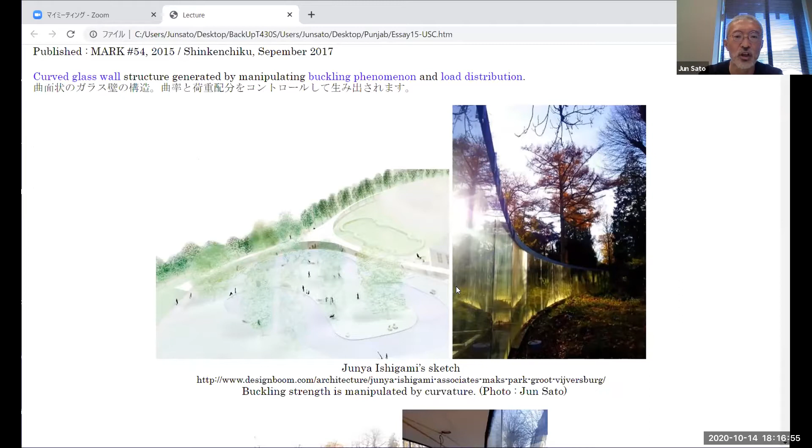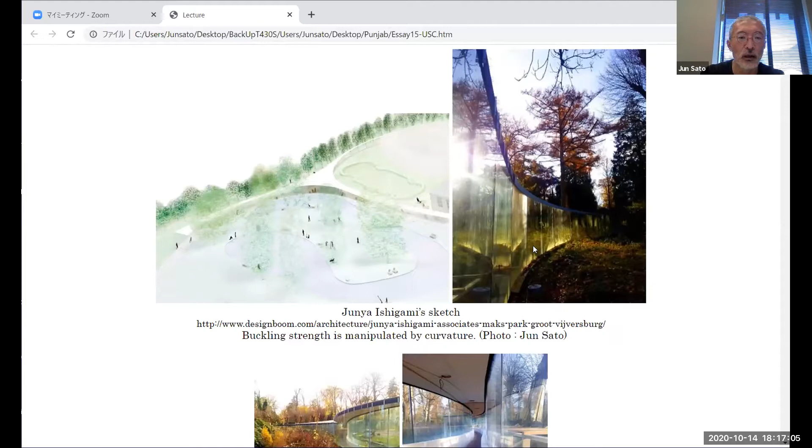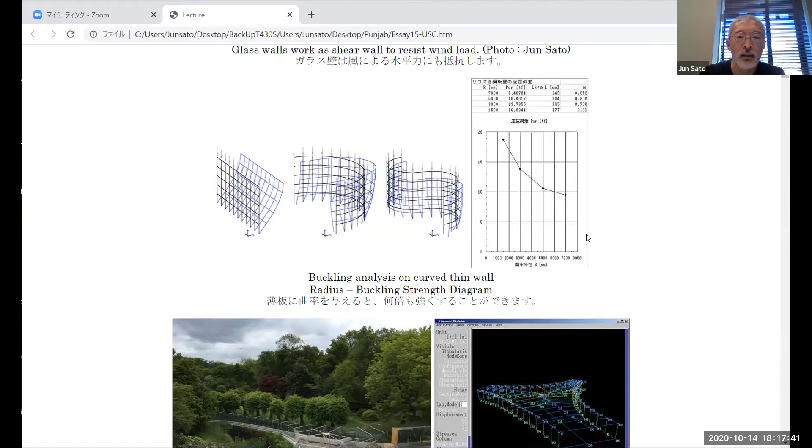When the thin wall could be curved like this, this shows the relationship between radius and buckling strength. As the radius comes smaller, the buckling strength becomes almost twice as big, or sometimes 4 times, 6 times bigger. So depending on the load distribution, we can give curvature to the stressful area. For this project, I optimized the location of beams as well, the spacing of the beams, meaning the pattern of beams could be optimized to distribute the load evenly to the stressless area on the glass wall.

And finally, we could build this structure with only 10 millimeter plus 10 millimeter double layered glass. You can see the construction site on the left photo. The white lines you can see are beams assembled in an optimized way.

When discussing with Junya Ishigami, we tried brainstorming again and again, and it takes really a long time, 5 hours is rather short, 5 to 8 hours each day. He asked me a lot about the structural phenomena, and I had to explain how the buckling phenomenon happens, how to control the buckling strength, and how to manipulate materials. Through that detailed thinking of each phenomenon, sometimes a new structural or design idea comes up, so this discussion is necessary.

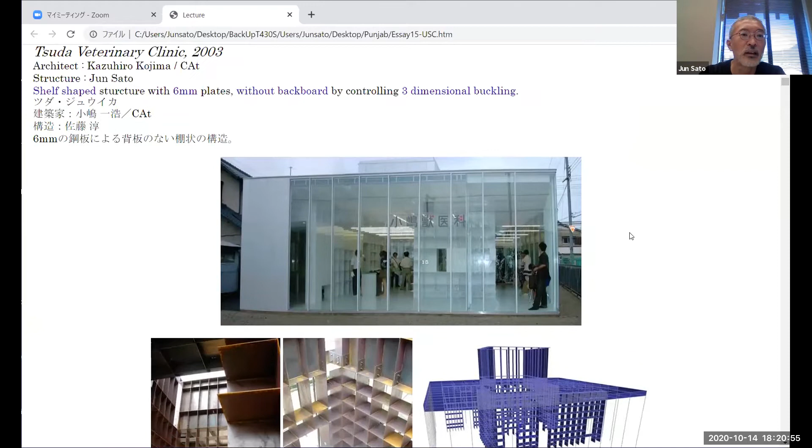But this is unique for Junya Ishigami, not all architects. With other architects, I don't discuss so long. There are some simpler ways of embedding structural design into simple geometry, but I'll skip these for now and talk about it later if I have time. For example, this is a simple single-story building, a veterinary clinic, and the structure is composed of a shelves structure made of 6mm steel plate without a backboard, so you can see the transparent shelves because there's no backboard.

These are the construction sites. And we have to control the three-dimensional buckling phenomena.

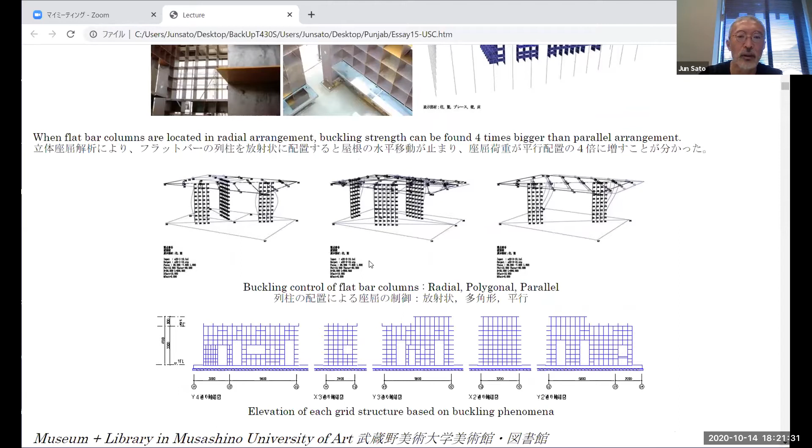This is a project with Sou Fujimoto, the museum and library in Musashino University. And for this library, I have embedded the thin rahmen structure.

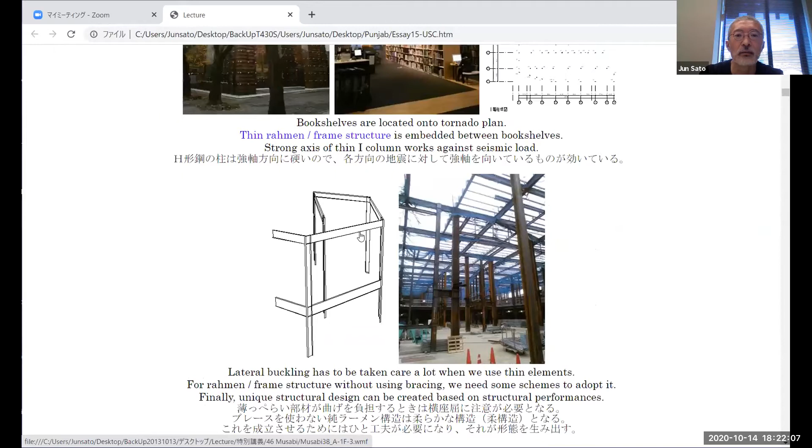Rahmen is a German term. I think it is called rigid frame or frame structure. It could be thin and thin like this, embedded between these bookshelves. To make it feasible using thin columns, we had to take care of lateral buckling here.

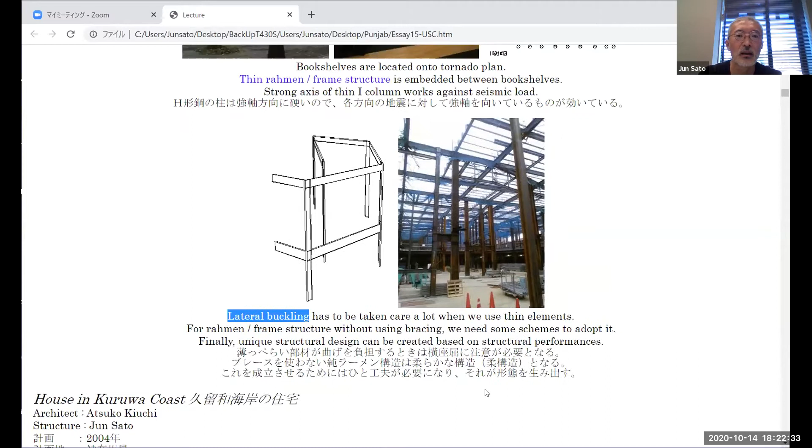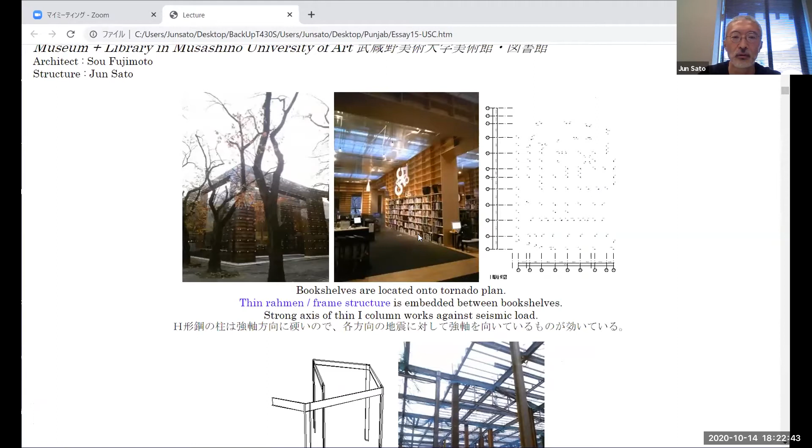This rahmen structure is a very simple structure, and this building has a really simple view, but by manipulating some structural performances, the unique structural design can be created based on those performances. The structure itself will be concealed, but it is working to create the space.

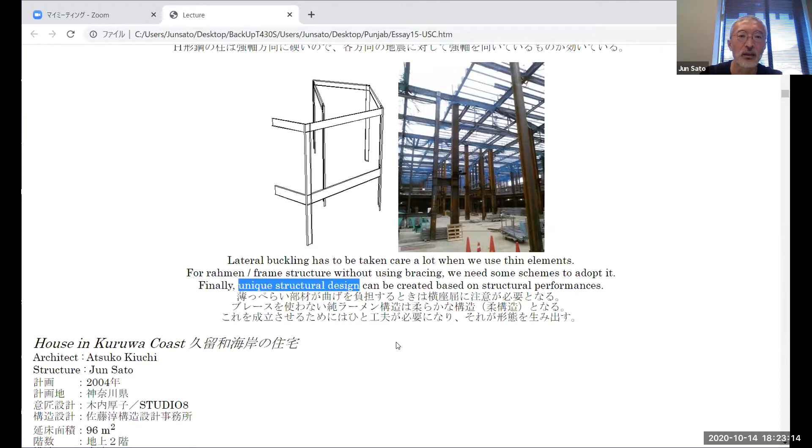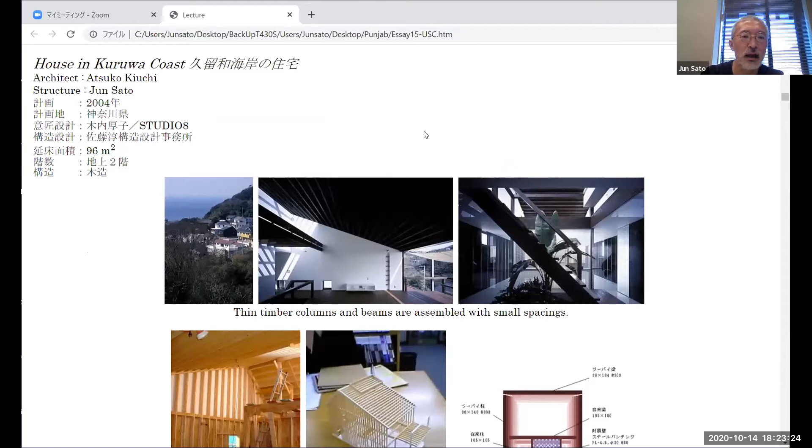So I think this can be recognized as one way of structural design. And I like this house - I cannot talk about it so much, but a house in Kuruwa Coast. It's a timber structural house with a simple shape like this, and inside there's a perforated steel sheet.

This works as bracing on the first floor, and that shear wall is stabilizing the columns located around here. The columns are cantilevered up to the second floor. Finally, because these columns can work against seismic or wind load, we don't have to put a shear wall on the second floor.

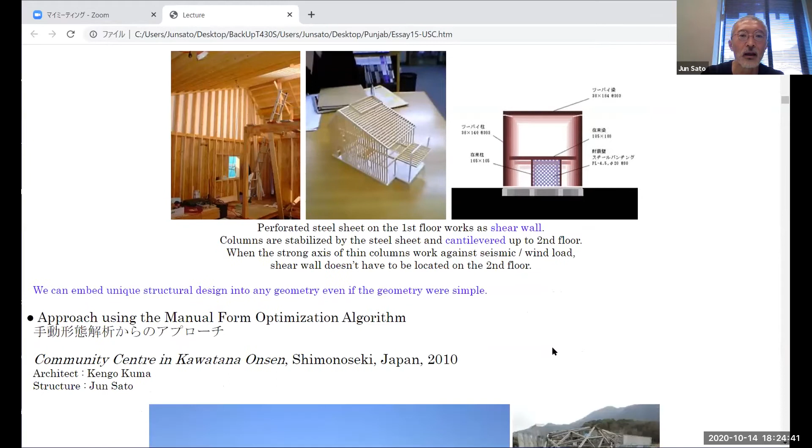This is also a simple way of using structural performance, but I think you can see how the structural design can be embedded into a simple geometry.

I think some of you have interest in optimization, form optimization. I'm trying manual form optimization and a little automated optimization. One project could be this community center in Kawatana Onsen with Kengo Kuma.

It has a polyhedral form, like mountains, and is made of steel tube structure covered with concrete surface. For this structure, I have developed optimization software like this.

When the polyhedral shape was concaved and convex in a random way - not really random, it is controlled, but looks like random - some shapes are strong, some shapes will show weakness. So we have to control those geometries.

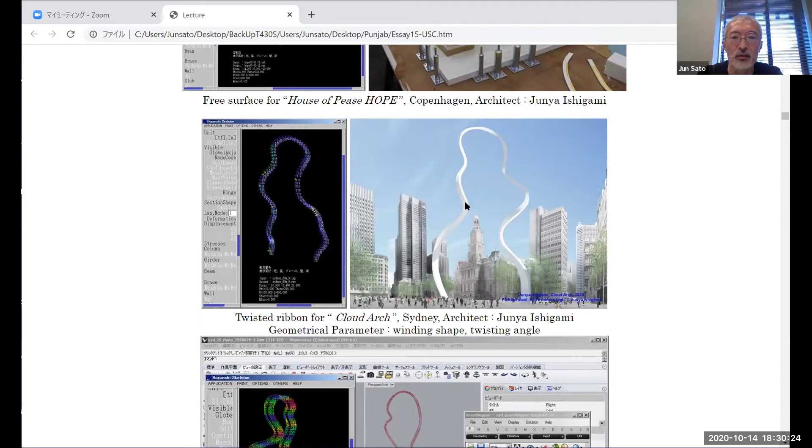It has this ribbon-like structure, and the parameter for optimization is how this tower could be wound into the air. The curved line can be optimized, and also the twisting angle can be optimized. So there are 2 parameters of geometry we used for optimization.

This can be done by software developed in my lab and in the office. But these days, we have a lot of 3D modeling software like Rhinoceros and Grasshopper, or some other software. So we can create the component of the software.

For example, composing the software with Rhinoceros, Grasshopper, and my software. It is called Hogan.

If it could be linked, the geometrical manipulation can be done by 3-dimensional modeling software, like Grasshopper. And the safety ratio can be checked by my software; this software component tries to check the safety ratio every time you change the shape, again and again. This iteration is understood as an optimization process.

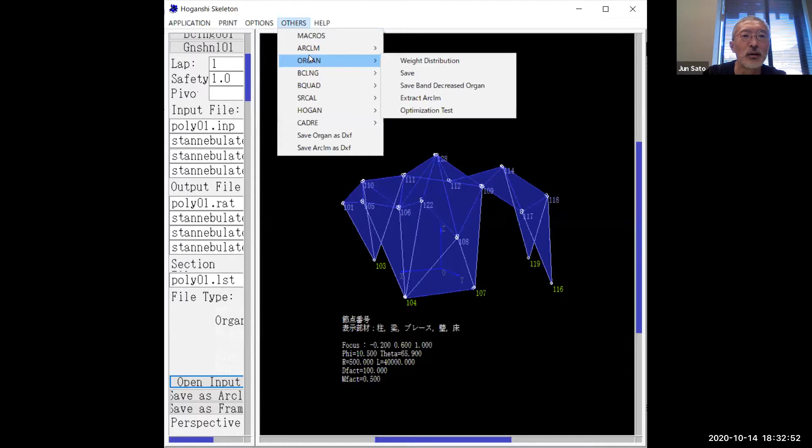And I think many of you know how the optimization could be done. So this is not so unique, but if it is automated, at first the safety ratio shows 1.53. So over 1.0, that means too weak. And starting the optimization like this, it is searching how the form should be transformed.

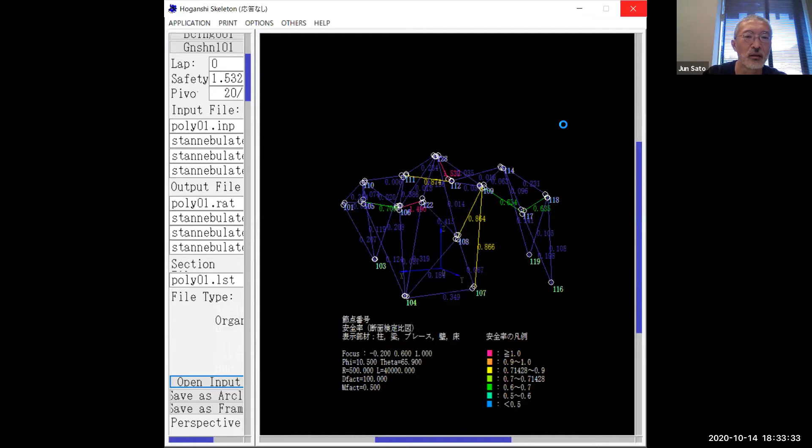And in this algorithm, I'm using the conjugate gradient method. There's the gradient descent method, the basic one for optimization, and a little, how to say, developed to find the result faster, we have the conjugate gradient method. And some other methods are developed to find the solution quickly.

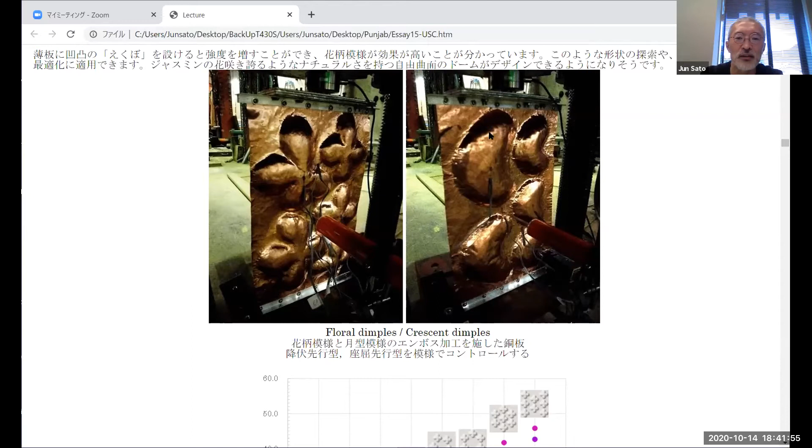And 2 years ago, my student in the master's course found the flower dimples are much stronger than circle dimples or crescent dimples. So we are trying to scatter the flower dimples like this onto stressful areas. And finally, we will be able to develop a free-form dome with scattered flower dimples, or a thin metal shell structure with these jasmine dimples.

And because these dimples are applicable for thin metal structures, I have started developing the lunar Mars base with JAXA, that's Japanese NASA. It is a little confidential, but using those dimples and something deployable structure for that.

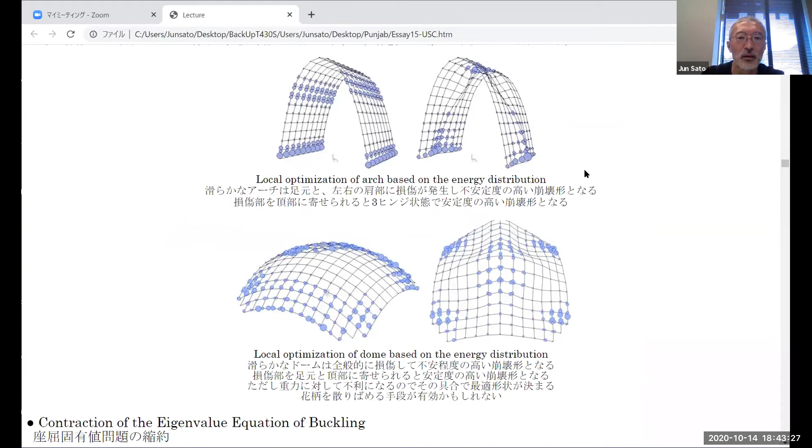And energy absorption based on the seismic vibration will be applicable for the optimization, but I'll skip it. I think I don't have so much time. And for the buckling phenomenon, it is good to look at the eigenvalue equation. I hope some of you are structural engineering students, but I'm not sure. But if you have interest in the buckling phenomenon, it will be good to focus like this. All right, I'll skip it.

And standard glass structure is developed in my lab as well. In my lab, some glass structures are developed like this. And extreme nature with Junya Ishigami is developed. This structure looks simple as well, but the deformation and the bending stress could be reduced in this way.

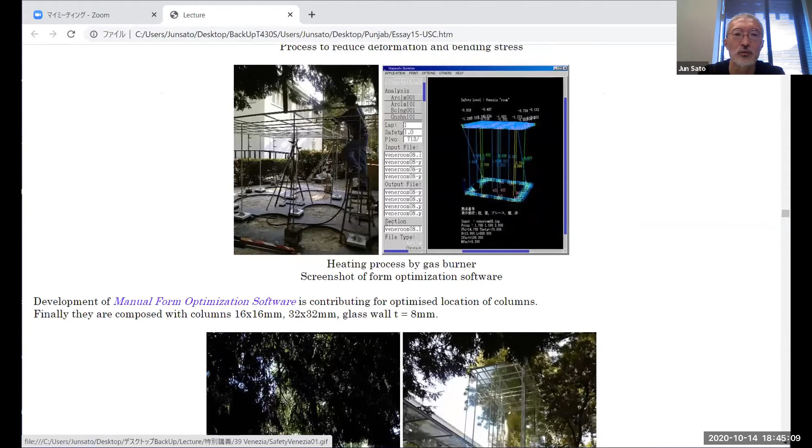It takes time to explain this process, but using heat cambering, a heating process, we could give camber to the beam, to the roof, and the location of columns could be optimized with this optimization software as well. And finally, the columns could become 16 millimeter or 32 millimeter like this.

And I don't have so much time, but for the geometry, I can show you some projects. Sunny Hills in Aoyama in Tokyo, with Kengo Kuma, is composed with timber structure. It is called kigumi in Japanese. Kigumi is timber joinery without using metal fixing. And for this structure, I referred to the Chidori or Jigoku grid, developed by traditional carpenters in the Hida district in Japan.

It looks perfectly interlocked upper and lower, but it is not easy to interlock more than 3 timbers perfectly going up and down, but these carpenters made it feasible like this.

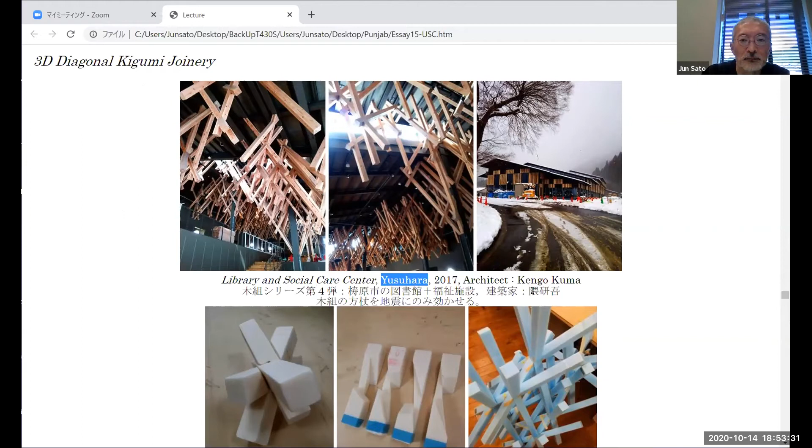This is one of the ways the Kigumi structure developed more. I'm now in this library. This is three-dimensional diagonal Kigumi joinery. This is a library in Yusuhara town, done by Kengo Kuma. And for this structure, I have developed this timber joinery. The 4 timbers can be interlocked, and the center lines can cross at just one point.

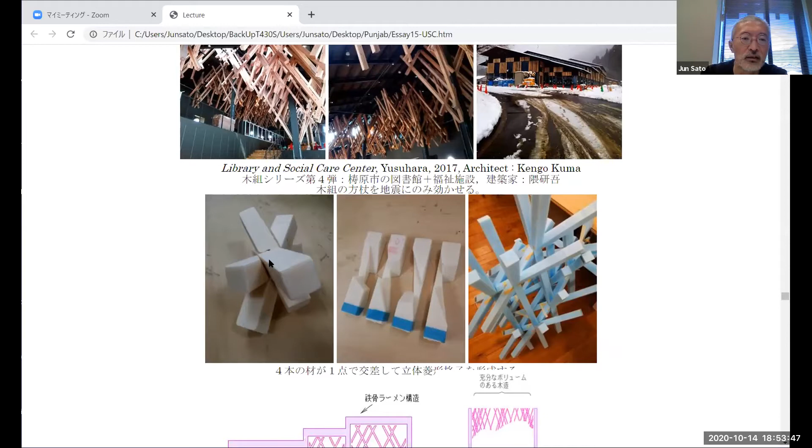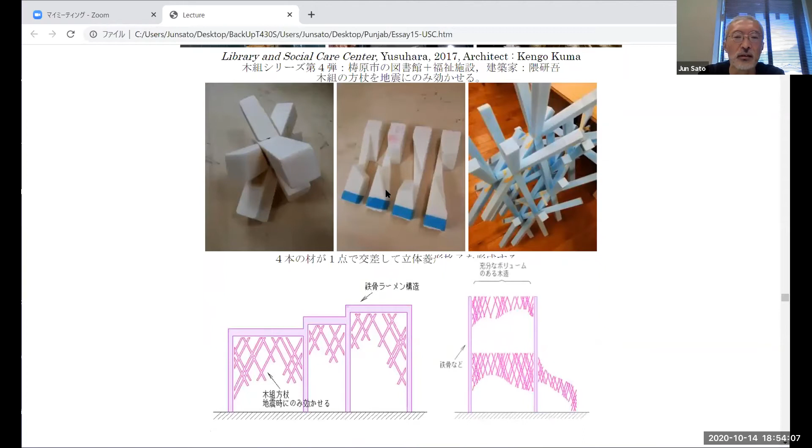And so we can develop the diamond grid like this, and even if the angles are the same, to make the construction easy, we can think of the spacing to be random like this. This geometry has not so many parameters, but finally it could show some naturalness. I'm not sure it is natural or not, and we had to reduce the number of timbers for the budget. But still, I think it has some naturalness because of this randomness of the geometry.

And when we think of the structure to be composed with many elements, or we could have enough depth, like this roof or floor, the elements can become really thin and lightweight. So it becomes a safe structure, even if it collapsed. The people inside here will not die under that disaster.

And with Kengo Kuma, we're developing more complicated kigumi shapes. This is the pergola at the bottom of Curved Tower in Vancouver. Curved Tower is a skyscraper. I'm not sure the construction has started or not, but after that, at the bottom, this pergola will be built. This is just a partial model. It will be 40 meters long, 15 meters tall.

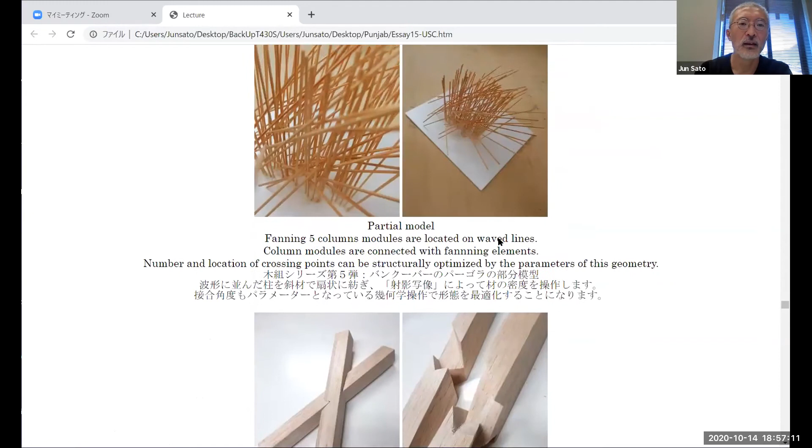I think it will become easier to provide a lot of this joinery, and it will become much more feasible to realize this kigumi structure or more complicated kigumi structures. And this is one example of how computational design or parametric design could be realized. This is a really small project, a treehouse in Setagaya.

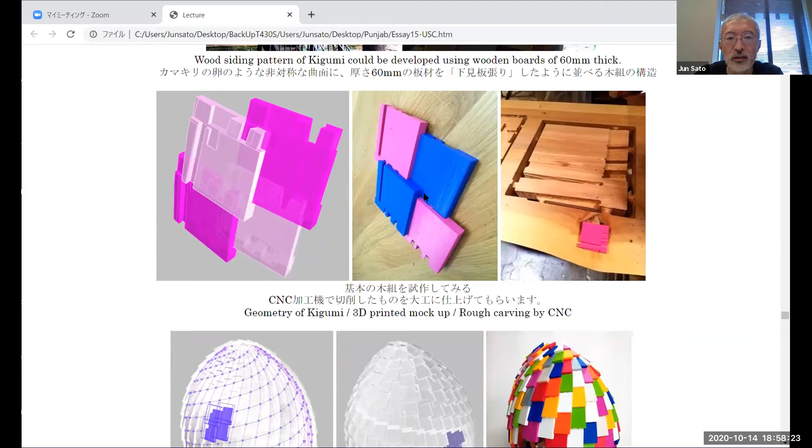For this project, around 400 panels of wood could be assembled. These panels are the main structure of this treehouse. It has this shape and is interlocked like this. The 4 panels are overlapped here. But when we carve like this, it is possible to assemble in this way. And the overall shape of this tree house is an asymmetric egg shape, which looks like a mantis egg.

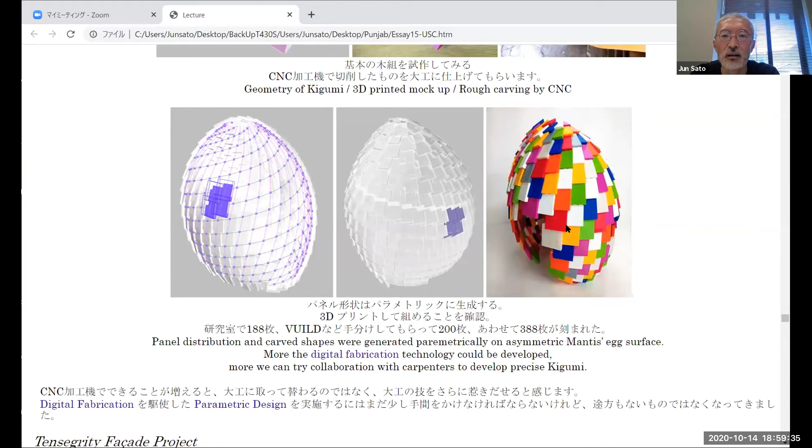And we could check with this 3D printed model. And finally, the timbers could be carved by CNC and carpenters, like this. So I could feel that computational design or parametric design is becoming much more feasible in these years using digital fabrication.

I could feel that digital fabrication technology could be developed more. That doesn't mean the CNC will replace the carpenters. Rather, we can try to extract more technique from carpenters. Carpenters have more technique to carve. So when CNC develops more, the carpenters can show more technique to carve.

So we can develop the parametric design, or those designs, in parallel with the technologies, using those techniques in parallel. And for using digital fabrication, I'm now developing this facade system with a Thai company and a Japanese company, Thai company Kinsey and Japanese company Heartland Engineering.

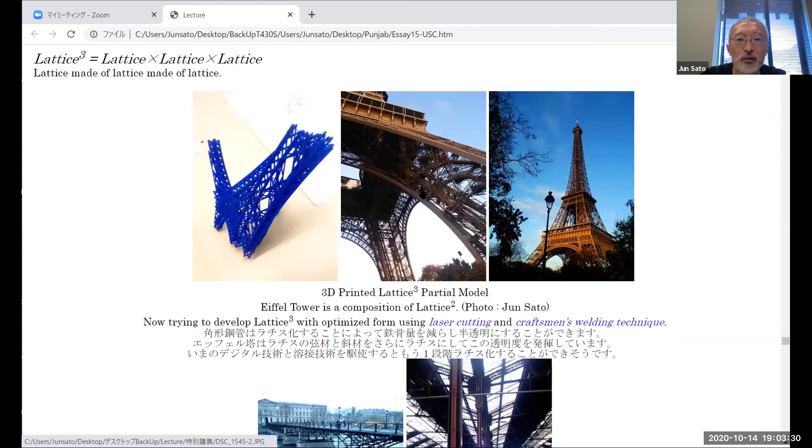And another structure I'm focusing on is a lattice structure, like this. For example, the Eiffel Tower is a lattice structure. You can see the element of lattice here on the leg of the Eiffel Tower. Each element, like this X element, or the flange element, is composed of lattice again. So that means lattice squared structure.

And right now, we can try to develop it into a lattice cubed structure using laser cutting and craftsman's welding technique. So in some projects, I'm now proposing this lattice structure. Sometimes we should simplify it because of budget and time. Sometimes lattice structure on the flange and lattice structure on the web, or lattice plus lattice. Anyway, some projects are going on, and they will show the phase of feasibility where we are now.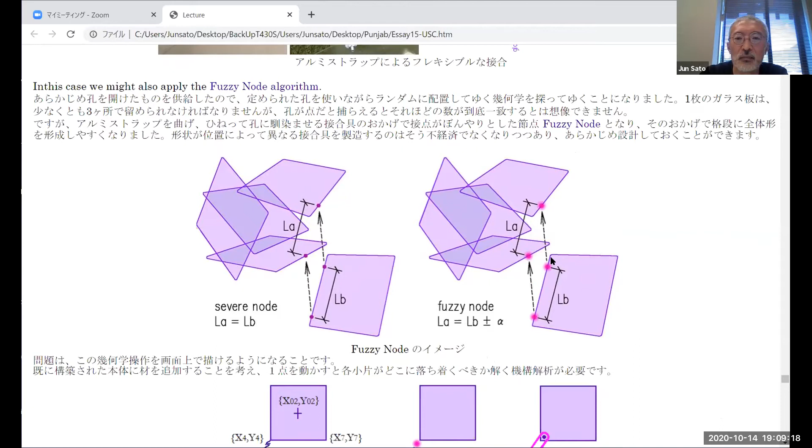And this is at Stanford University. A similar workshop I have run in Tokyo, and students could develop shapes like this. Anyway, because of the fastener made of aluminum strap, we could bend it or twist it to adjust to the holes. So because of this joinery, the node could be fuzzy, and it was easy to attach the units, modules, one by one, like this.

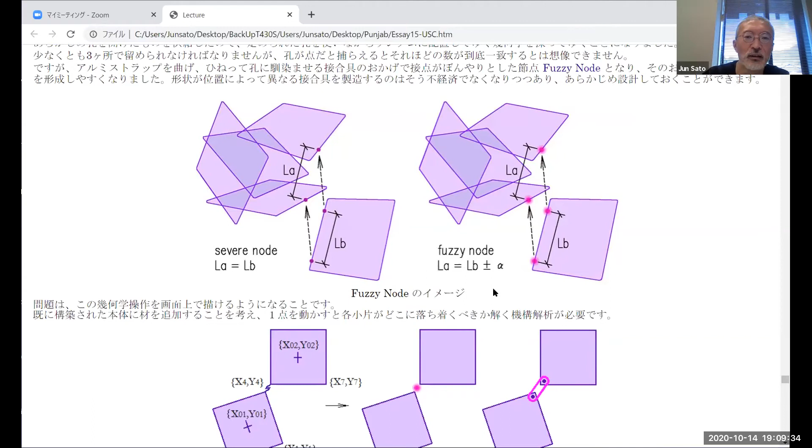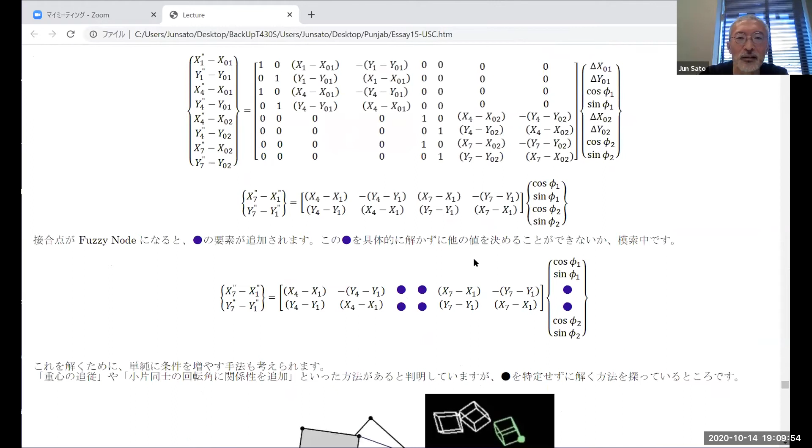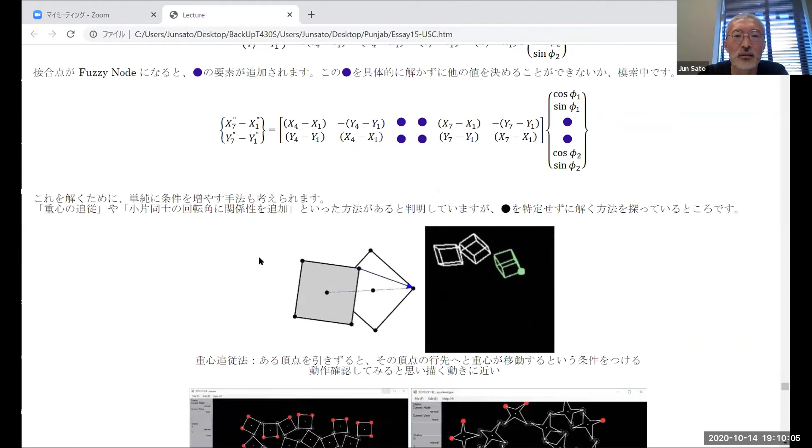So if we could manipulate this geometry on display of the laptop, we can design the pattern, but we have to create that tool, or we have to solve mathematically this fuzzy node. It is not perfectly solved yet, but some students in my lab have tried to put a little more conditions to solve the formula, or we are now trying the singular or eigenvalue analysis for this geometry.

And one of the students could develop the software to design the pattern like this. And this is almost final. Using spectrum method and optimization method, this is one of the samples we can develop.

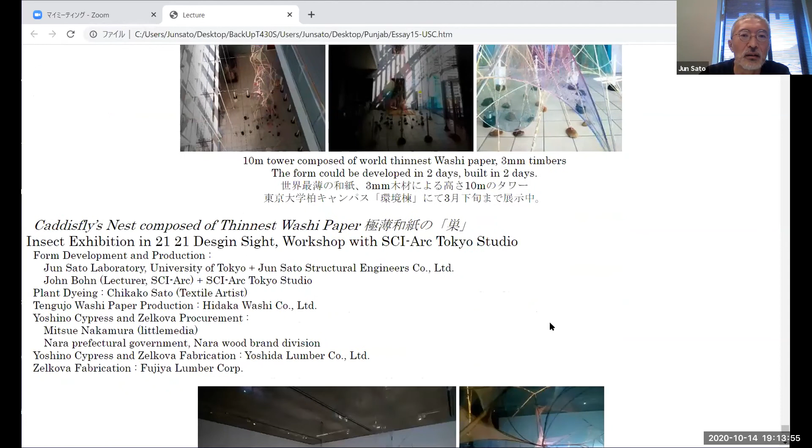And before this, using the same material, this installation could be built in an insect exhibition held in Roppongi in Japan, 21_21 Design Sight museum. It was done with SCI-Arc Tokyo Studio. Around 15 students from SCI-Arc were staying in Tokyo for several months, so we could collaborate. Using the thinnest washi paper like this and 3-millimeter timbers, we could develop a 9-meter-long piece, referring to the caddisfly's nest.

It can be understood as kind of biomimetics, and because the washi paper can squeeze the frame, the timbers are working with active bending. And because of this active bending, the module can work as a hard element. And the overall shape was again developed by form optimization. And the washi paper was plant dyed by the dyeing artist Chikako Sato, and the connection and the module shapes were developed.